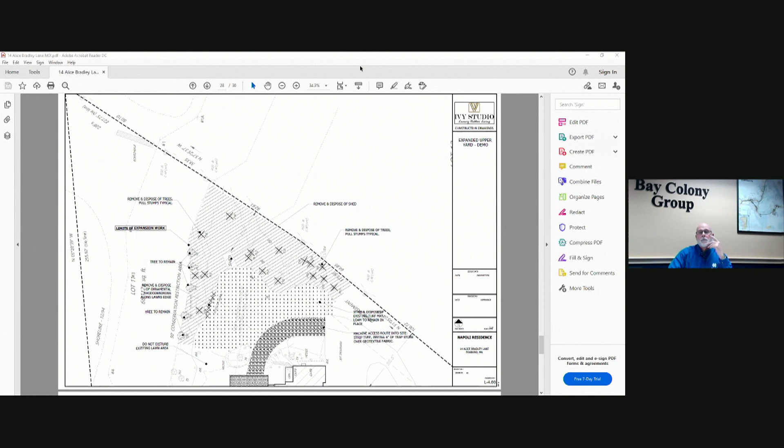That's pretty much it. That sums up what we intend to do. If I went through too fast, anyone have any questions?

Any questions from the board? I visited this site and I understand what's going on, so I'll hold mine for a minute.

Dave? Oh, Dave has to unmute. Dave, you have to unmute. Oh, I see his... nope, technical issue. Okay, I'll switch down to Peter.

Any questions, or were you able to visit the site? Unfortunately, I wasn't able to visit the site. No. I mean, it sounds basically straightforward if they're staying outside of the restrictions.

The only part, Peter, that we're following straight through is the conservation restriction document. It should also be noted that we walked this site, Sal and Gretchen and myself, with Jane and Judy back in May 20th of 2020. So this has been a lot, 8 months worth of planning, going back and forth, working with the landscape architects and stuff, and how this was going to come together.

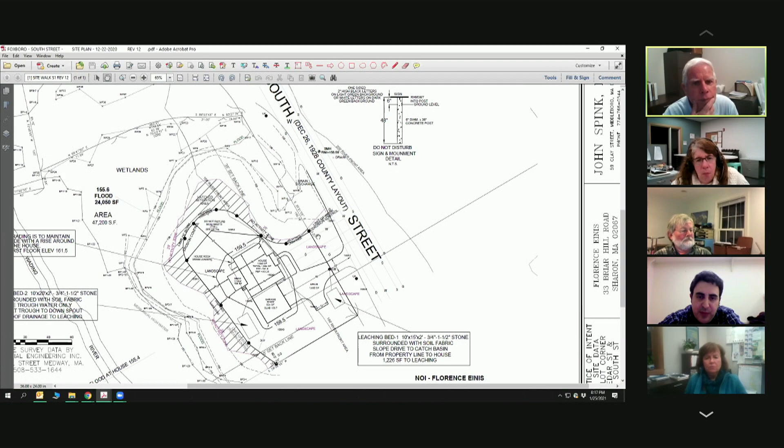If I misspoke in my email, I apologize. I believe we understood that you were looking for the disturbance outside so this is the lot property. Right, you wanted us to quantify the disturbance to put the utilities in the drive. Correct.

The landscape, it says landscape. The landscape alterations are still part of that riverfront area, and it should still be quantified in square footage. Right, you're looking for the quantification of any work in the right of way associated with this, correct? Right, I'm very literal, so whatever you write, I take literally.

Okay, well, that's what I want to clarify. We have not quantified this. We thought we were all set at the last hearing. We've provided every bit of information this board has asked. If I had known this was still an outstanding item, we would have provided it prior to tonight's hearing. This only came to our attention this afternoon, and unfortunately Mr. Spink's not available, or I would have had a number for you tonight.

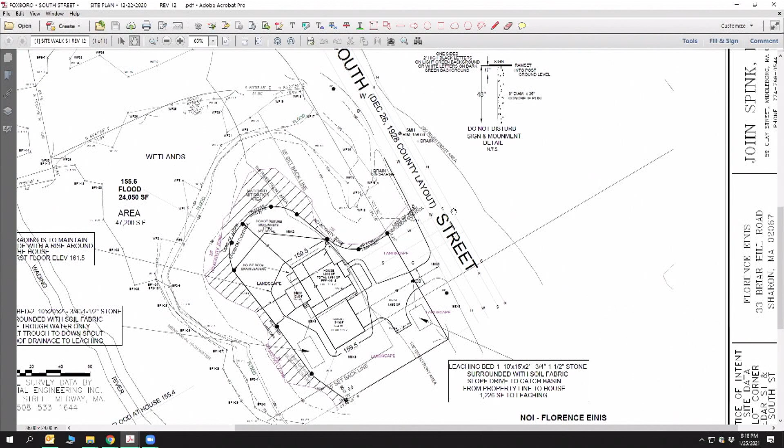I don't know if the board can close the hearing and we can provide it. You have a hearing next week. We'd be happy to provide that info by then for you. Again, it's not on our lot, so it's in the right of way. I'm not sure how this commission typically handles quantification of right of way work for lot development. I don't think we usually consider right of ways.

But if it's a proposed alteration, it should be part of the discussion, shouldn't it? Because it's still part of the riverfront area, and there are certain provisions. But are we talking about a lot though? We're not talking about outside the lot, are we? No, he's included different calculations. And it's not clear which is which, and that's what I asked him about. Chris, I mean, just...

Let us know, what is the square footage you think would be impacted? I'm not sure, I mean it's got to be a small number. Maybe 1,000 square feet, I don't know, I'd have to... Might be able to scale that off right now and give you a rough number. Thank you, that's the plan.

Jim, you received the information that I just sent out, right? Yep, yeah. Okay, because those are the cheat sheets, you guys can do what you want with them. This is what was sent at like 6:57, right? You talking to me? Yeah. What is 6:57? It was sent around that time, right? The one that I sent last minute.

Yes, I just wanted to know what... because I have revised some of the riverfront calculations going back and forth. Okay, Jane, I don't have it because you know me, I wasn't on my computer today, so. Okay, I'm printing it out for you right now. Okay. You won't get the colors, but you'll have the document.

Is that correct? Conservatively, yeah, looking at this area, I just did a rectangle from this limit of work straight down here, which is overly conservative. That's 1,800 square feet at the maximum, which is likely less because that would exclude this piece here. So if this is all being altered for this, you're looking at roughly 1,800 square feet. All right, I think that's good enough for me with respect to that number.

Hold on. There should be 2 copies. It-

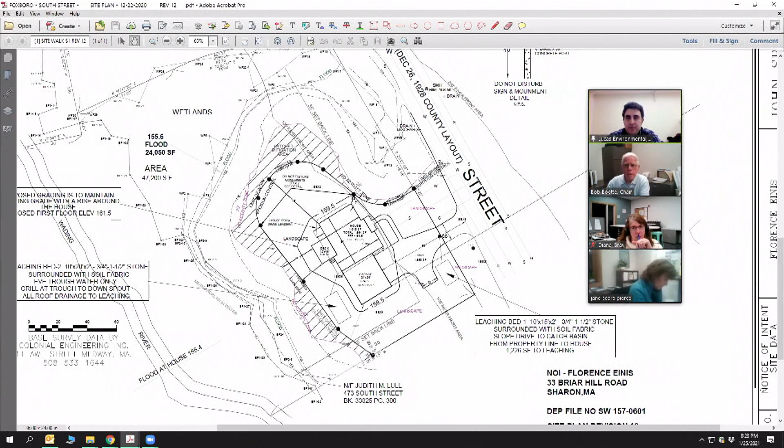All right, Jim, what was the latest? I was just going to pick out the 7 pages. I think Chris just came back with a conservative number of about 1,800 square feet.

Mind you, this is off the property. I understand what Jane's saying, but it's part of the right of way. Yeah, not part of the lot. So how do you figure that in as part of the calculations? Yeah, you do. I don't think you do.

I don't see how it could be considered part of the lot, even though it's being done on town property. It's part of the cumulative alterations being proposed. But it's not on his lot. Still, it's proposing to do the work within the riverfront area. That's why this gets goofy. I think it's unfortunately getting a little goofier than it needs to.

So just, I mean, what do you mean it's not on the lot? I'm not sure what that means. What's that, Jeff? What do you mean it's not on the lot? Okay, it's on town property. It's not part of his property.

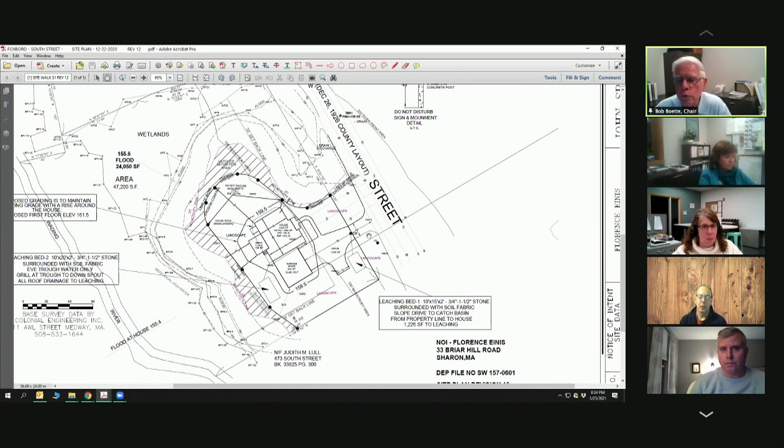Well, I mean, is it a right of way, or does the town own it? The town owns it. It's the layout of the street. The street is actually, say, 20 feet wide, but it's a 40-foot layout. So it's got about 10 feet of town property that he has to alter to get to his property.

So I mean, don't we normally own to the middle of the street? No, this is a county layout from 1928. So no, it's county land. So I don't know if that should come into the calculations or not. I'm not a legal expert on it, but...

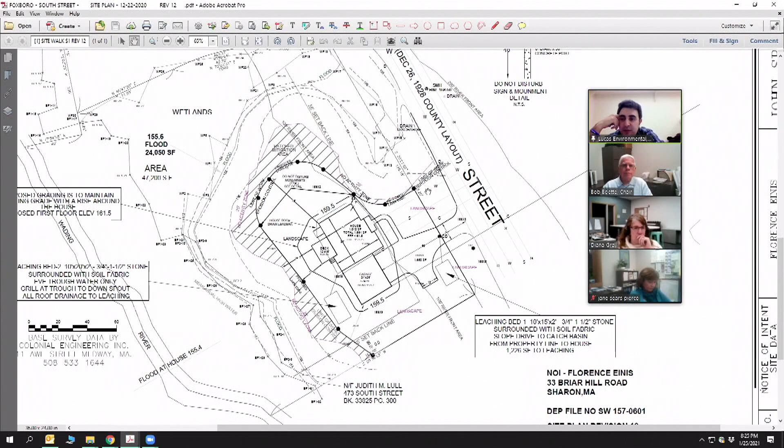If it's muddy in the waters, I'd say leave it out. That's my opinion, and I'm only one vote. Jim, what have you seen with other orders? We've seen it typically excluded from the calculations for the lot, but it could be shown in a fact of finding just so it's on the record. That's fine, we'd be fine with that. I agree with that, I think that's appropriate. So at least it's in the record. Yep.

Peter, any comments? So, yeah, this feels like a chicken and egg kind of situation. If you have a lot you need to build on and it's bordering on the road, then there has to be some consideration that that's going to be there and that work is going to get done like you're talking about. I appreciate what Jane's saying, given its proximity to the river, it kind of falls into this weird area, but this whole property falls under the grandfathering of the Rivers Protection Act.

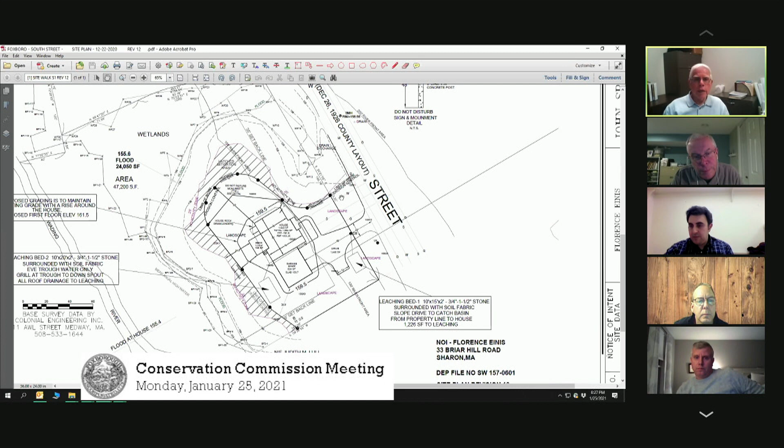So I guess I'm not as concerned about what's on the street as opposed to what's adjacent to the river, if that makes sense. I think David, what Jim said, I'm going to agree with Jim. Note it, but I'm not as worried about what's on the street as I am what's behind the house. Okay, David? He's muted again. What's that? He's muted again.

Okay, what about Judy? Any comments? Dave's unmuted now. Okay, David. I'm not going to get into discussion along the roadway, but I think...

There is a need to reduce the lawn size area as an alternative that really wasn't discussed. When you look underneath the alternative test, which the riverfront areas require, their explanation of that extensive lawn to the north side was for laydown. But if they install the utilities in front of the house, they could do laydown in front right there. They don't need to open up that whole area for laydown, and they could reduce the size of the lawn area to comply with the intent of the Riverfront Act.

Agree. I mean, we have discussed this, we've talked to Mr. Spink. The concerns were that having a laydown in front is going to limit access in and out, and that there isn't a lot of room on the right of way without tearing up more of the riverfront to park vehicles and construction vehicles. Spink has noted that they do need that area for construction laydown. And we've asked the board, with the amount of mitigation we've provided, which is not required, to have some consideration for that to remain lawn when we're done with the mitigation.